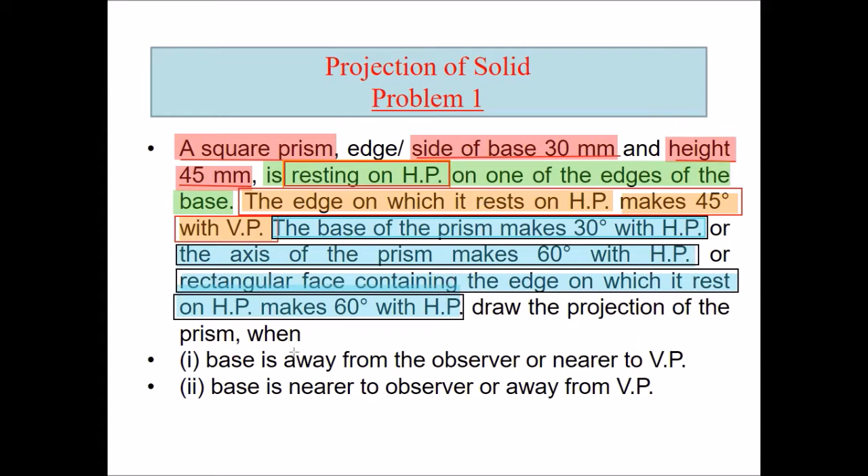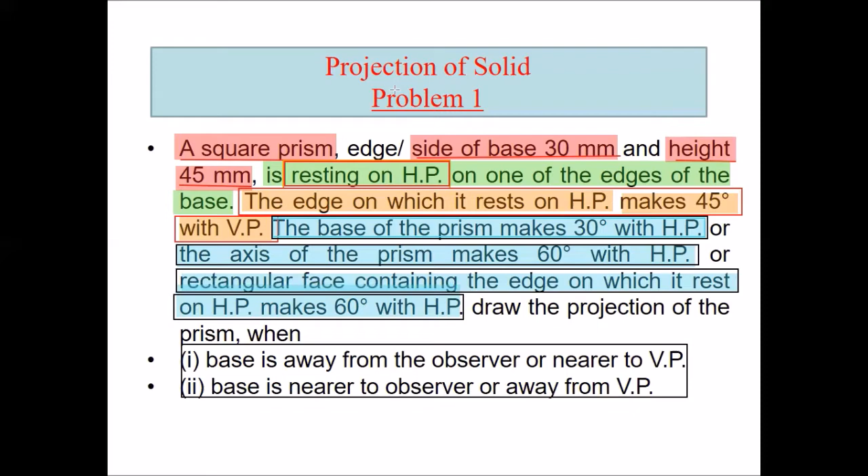And the next statement is going to justify the next criteria we should be following. And these two parameters over here, the base is away from the observer or nearer to the observer, is going to be justified in the draft format for the third step, which is indicating the inclination with vertical plane. Let's see how we can draft this problem.

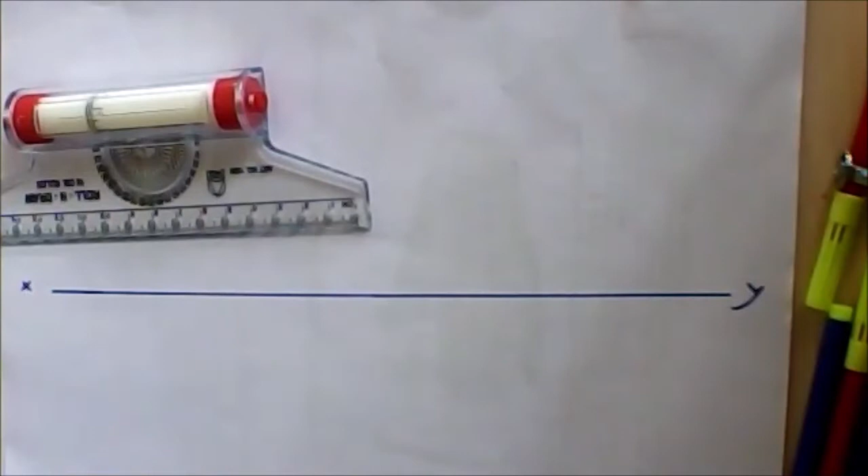So first we will draft reference line, which is representing axis of the profile we want to develop. After that, we are going to develop top view of that object. Let me mention over here the reference name. Now we'll draft top view of that profile. The data suggests that a square prism is there, which is having base edge length 30 mm and height 45 mm. I'll be placing 30 mm base over here and 45 mm height over here.

Why had we positioned this particular prism in this format? Because the problem statement had suggested that the component's face or base is becoming inclined to horizontal plane. So when the component's base or face is becoming inclined to horizontal plane, the orientation should be like this. Here we are getting a rectangular face. How can we see that? Let me show it to you.

First, let me draft the front view and top view of this given object. So I'll be drafting it over here. It is having 45 mm of height and 30 mm edge length. This is the profile. Now I need to mention the notations. Let me have A, B, C and D over here. We are following this ABCD notation for the base, which is right now placed on the reference.

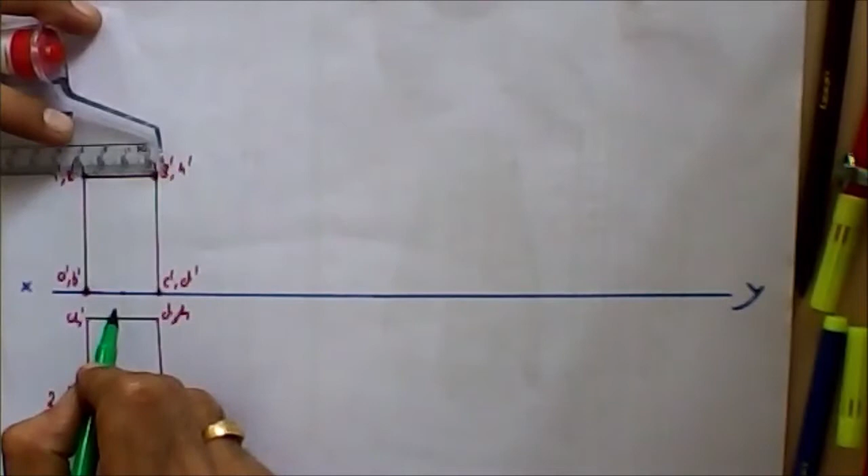If we had oriented it with a corner, then I may have a vertex over here. So there will be 2 points noted over here if there will be a vertex. And here 4 points are mentioned. It means that this particular line is representing a face. We do have one more criteria mentioned in our data statement, which was the axis of prism. So let me take that axis over here. Axis is defined just for understanding the aspect.

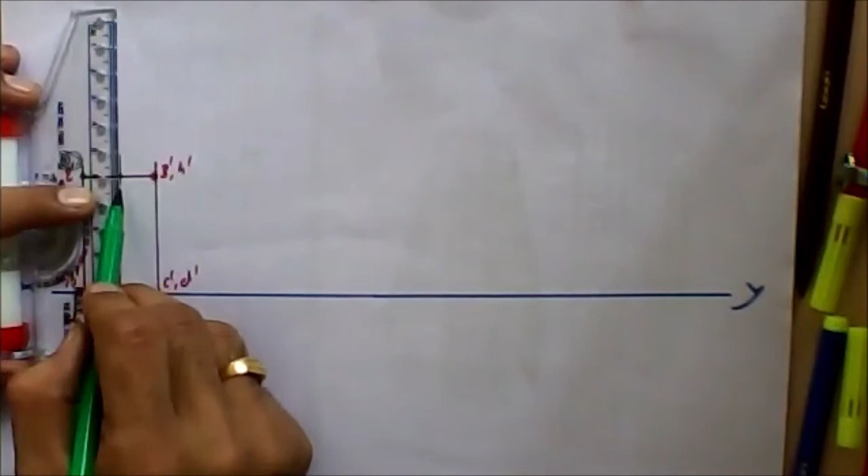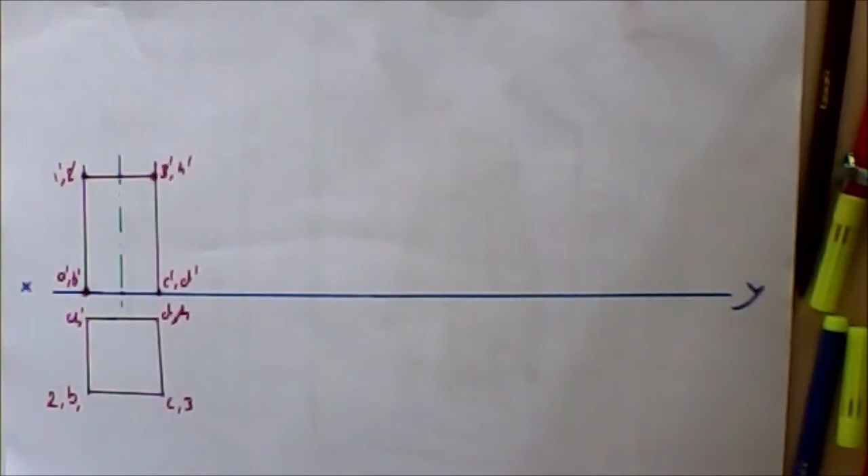Now the data had suggested that the base is inclined to the horizontal plane by 30 degrees. So let me take point C dash D dash position over here. C dash D dash. And after that, we need to have 30 degrees inclination of base, which is over here mentioned in terms of A dash, B dash, C dash, D dash.

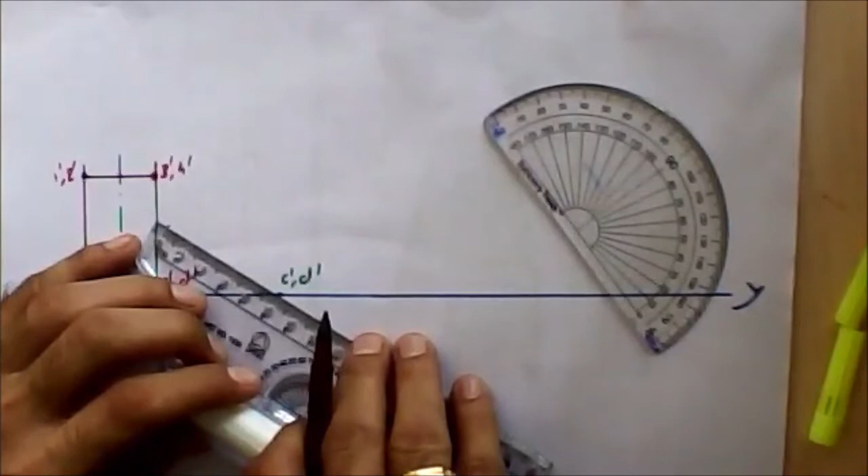So let me take 30 degrees of angle for base, and let's draft that base with the length of component which had been mentioned in the problem statement. So we are going for 30 units over here, because we are aware that the distance between C dash D dash and A dash B dash is 30 units. So over here I am going to have A dash B dash.

Now this 3 dash 4 dash point, or we can say C dash 3 dash D dash 4 dash, is becoming perpendicular to A dash B dash C dash D dash line, which is over here.

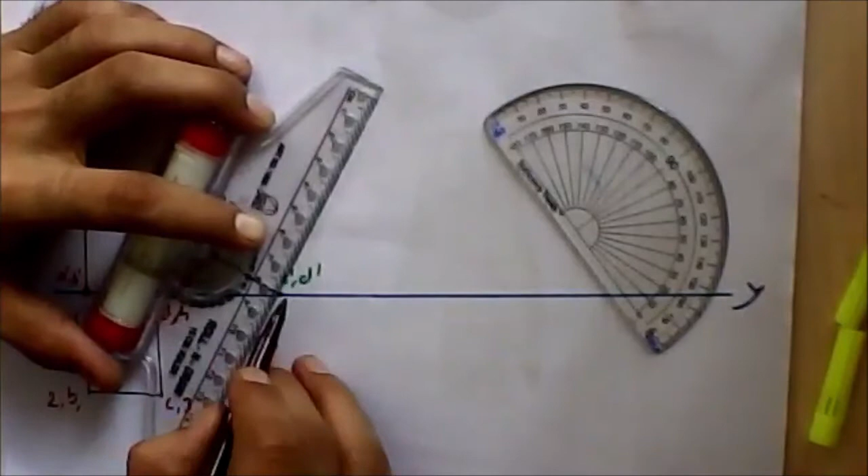So let me draft it from here for the same dimension which had been noted. So I'm moving ahead for same dimension, and let me connect those 2 points which are representing 1 dash 2 dash 3 dash 4 dash. So now I'm connecting that one. So this point is indicating 3 dash 4 dash, and this one is indicating 1 dash 2 dash.

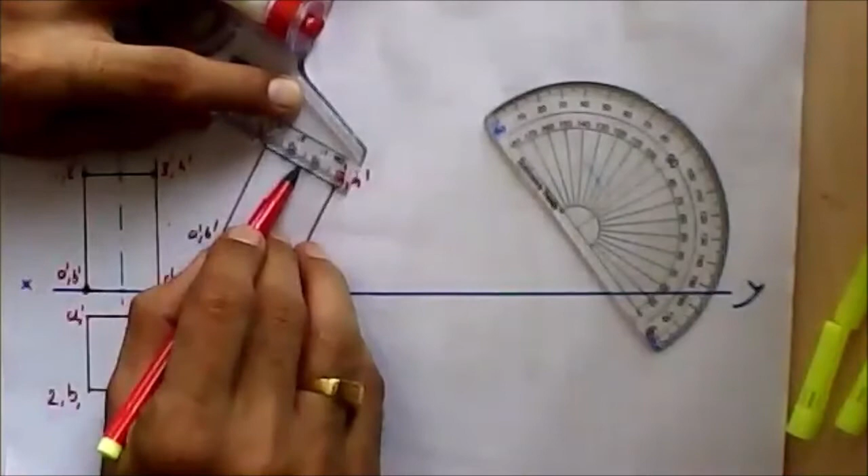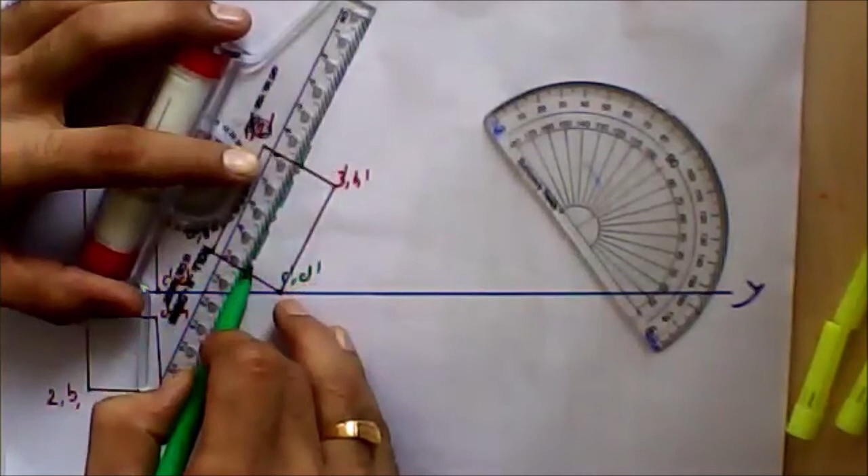We'll be having an axis mentioned over here. So let me drop that axis also. We are going to place an axis over here. Now you can see that we had taken this as an angle of base as 30 degrees. So obviously this particular angle of face is going to be 60 degrees.

This angle is going to be 60 degrees. This one is going to be 90 degrees. So the axis of that prism as well as this face are parallel. So if the base is inclined at 30 degrees and the profile angle is 90 degrees, then obviously the other angle is going to be 60 degrees. So all three statements mentioned in the data are associated with the same presentation: 30 degrees inclination of base, 60 degrees inclination of face, as well as 60 degrees inclination of axis.

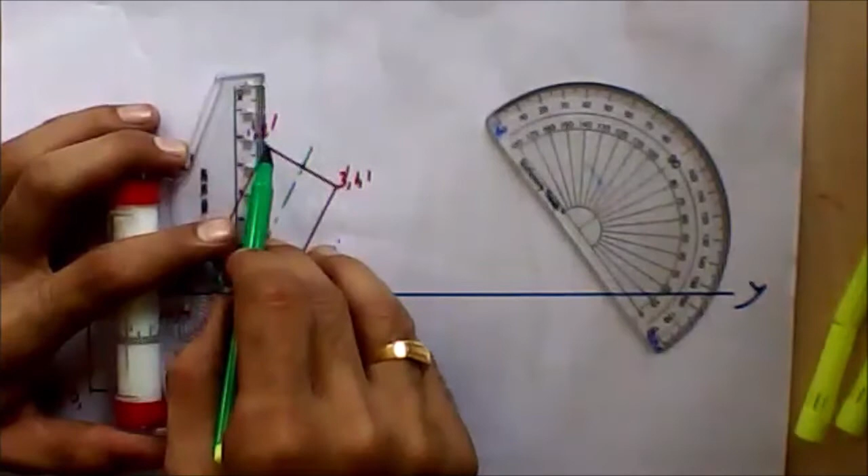Now let me draft the projection in the top view. So we are transferring projection over here in the top view, as well as the references from the previous view. And here we can see that point C dash D dash is not visible from the top. All other points are visible to us. So we are going to present C dash D dash in hidden format and others in full format. So let's identify those positions first.

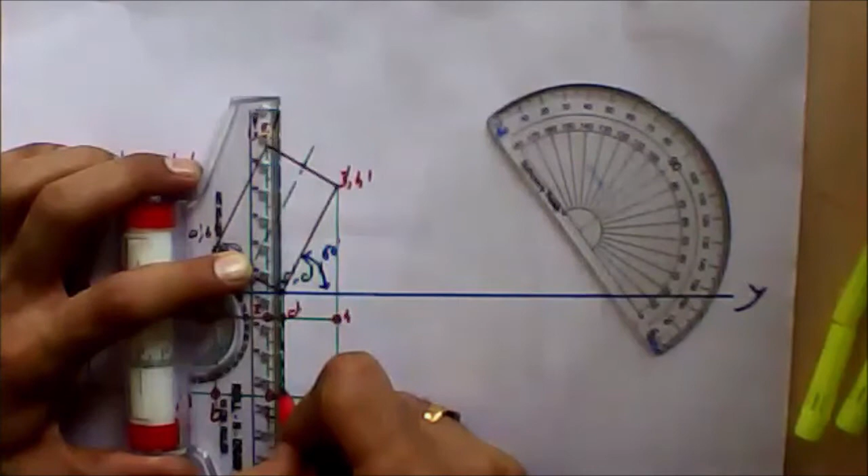Now we can connect all positions, but keep in mind that C dash D dash, or CD, is going to be in hidden format only. So we'll be positioning it in a hidden format. So CD is joined by hidden line format, and all other lines are going to be connected directly. So let me connect A with B, B with C, CD is hidden, DA.

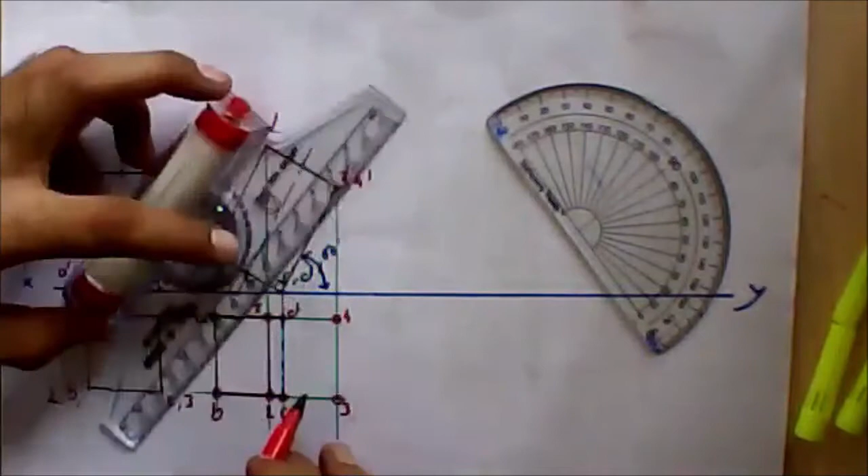Let me connect 1, 2, 2, 3, 3, 4, 4, 1, and at the same time A1, B2, C3 and D4 are also joined. So all vertices have been represented, all edges have been represented over here.

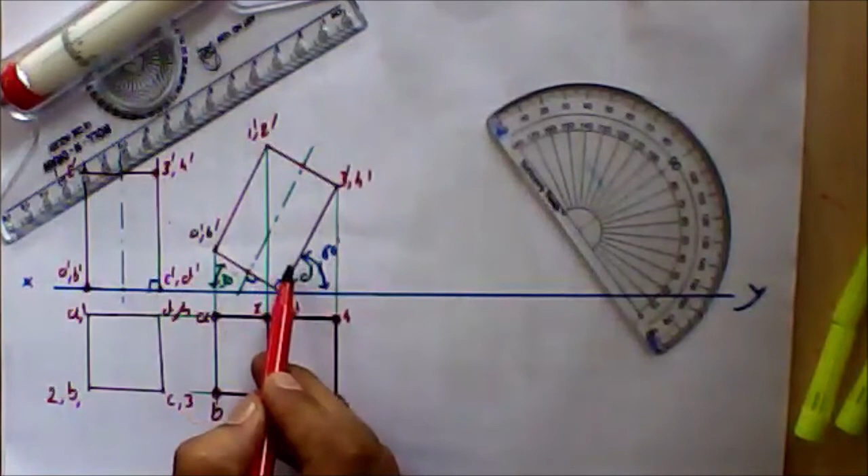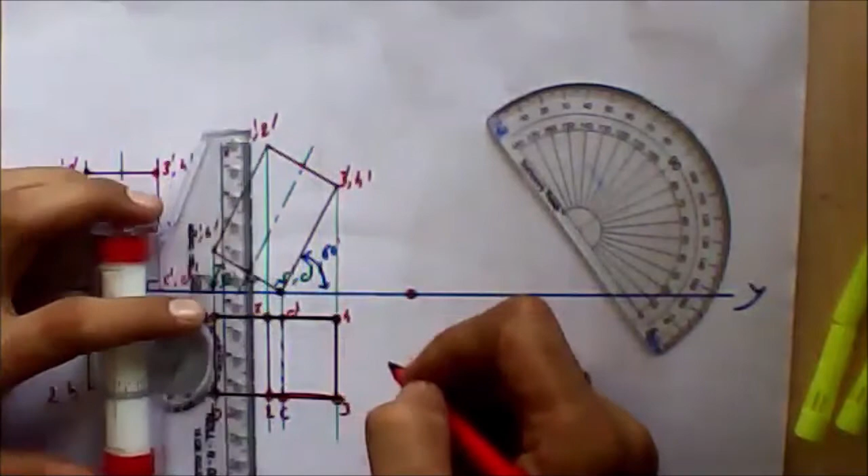Now let's think about the next statement, which is the edge on which it rests on HP, which is CD. It is resting on HP with the edge CD, and is inclined at 45 degrees to the vertical plane. So CD is inclined to the vertical plane. Let me take a position over here for presentation of an angle of 45 degrees. So I'm taking an angle of 45 degrees over here. You can draft a line.

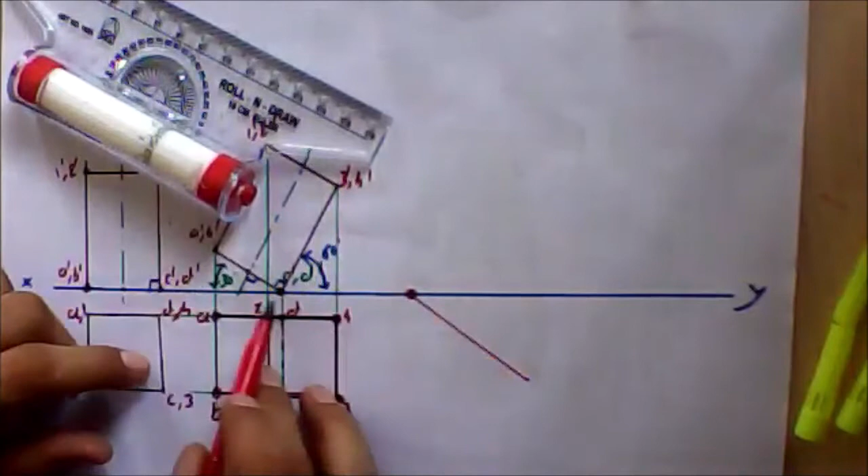Now you can see I have to place DC over here on this line. But when I plot DC on this line, if this whole geometry is reproduced over here at an angle of 45 degrees, the issue we are going to face is that point 3 is going to move away from this zone and it will be out of the plan portion. It is going to cross this reference line and we do not want that.

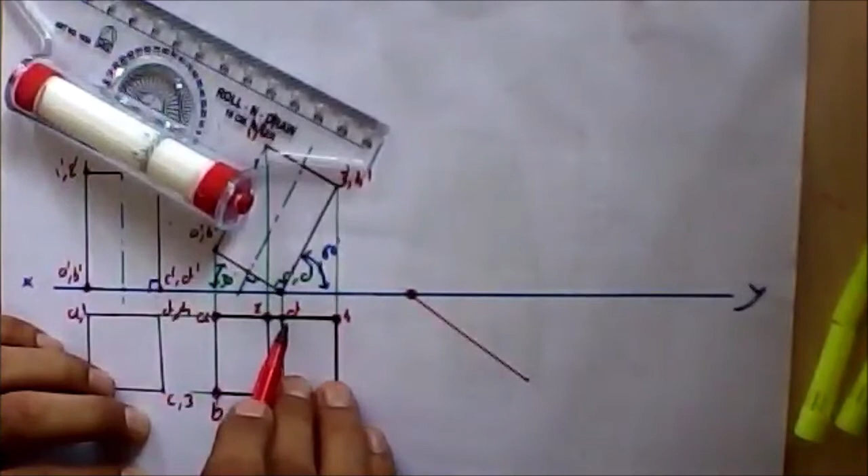So what we can do is, instead of placing it on this 45 degrees line, we can represent the angle 45 degrees from the position of DC and reproduce the whole geometry. So let's do the same over here. Yes, we are aware that we want DC at 45 degrees, but due to the lack of space, we are placing 4 points over here. After that, we'll be taking arcs to identify those positions. We are moving for the position 3 over here.

So this one is going to be 3. We are aware that 4A is perpendicular to 4 3, so we can directly have that position developed over here. In similar manner, we are going to have another aspect over here. Now let's draft those positions. I'll be taking arc length 3B, which is same as 4A. So I'll be noting those positions,

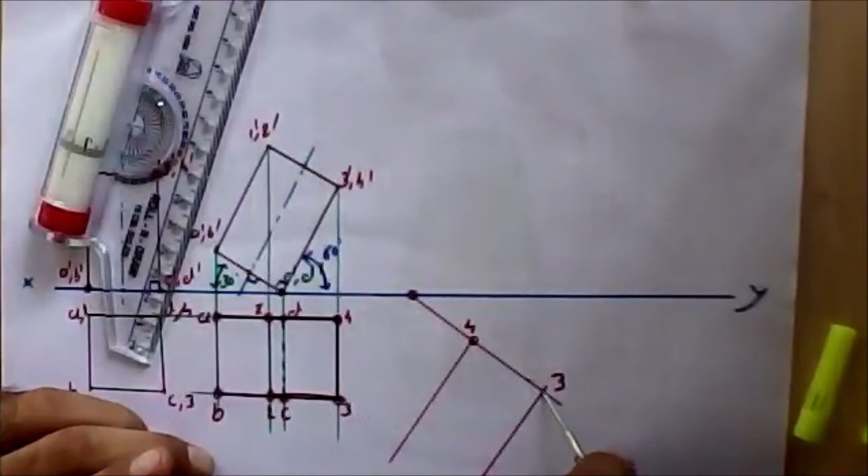and I'm connecting these points, which are A and B. So this one is B and this one is A. My whole geometry is going to be reproduced like this. Now I want 1 also mentioned in my image, and D. So I'll be moving for A1 arc length and representing that arc length over here as A1.

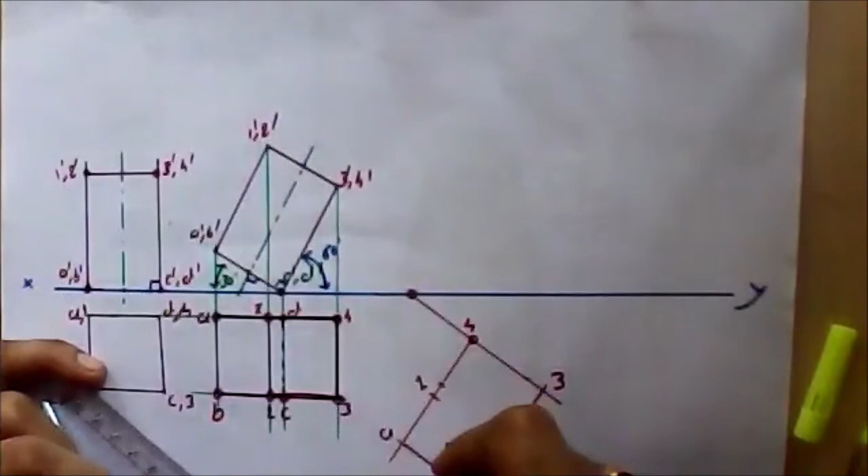I want D point position on that line, so I'll be taking arc length AD over here and placing it over here. Same length is going to be for the next component also, so I can directly use that arc length to develop that component. So now I am connecting these lines in the same format which is available in the previous view. So 1 2 is going to be over here and CD is going to be available over here. 1 2 is represented by a full line and CD is represented by a dashed line.

And we are aware that we want to represent that angle of inclination from CD only. So we'll be extending that one, producing this arc and showing 45 degrees of inclination over here.

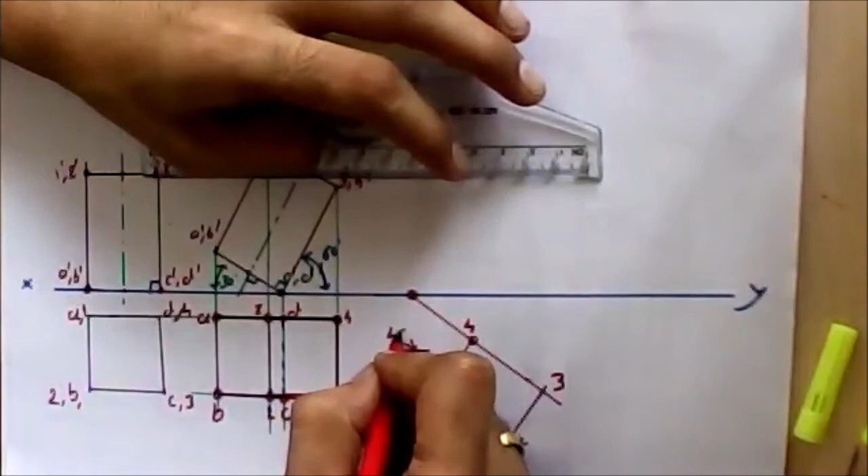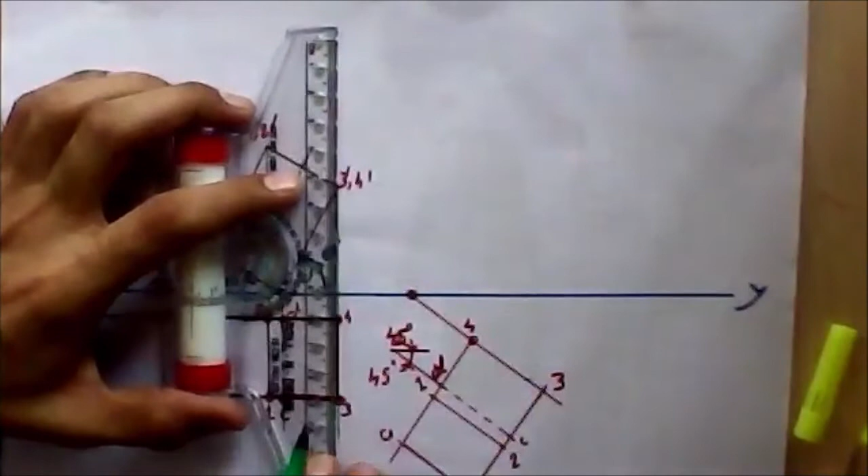This is the criteria. Now what should we do? We should be tracing all those points in front view. I'll be tracing A, then 1, then B, then D and 4 are at same orientation, so I'll be taking it, 2, C, and 3.

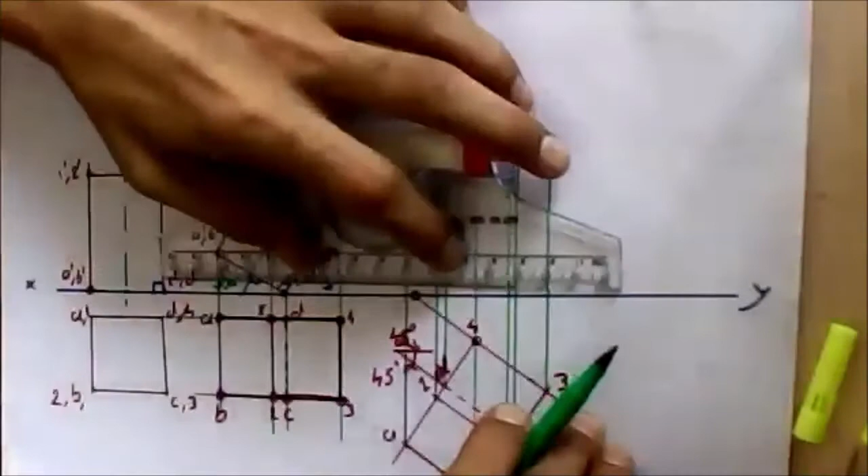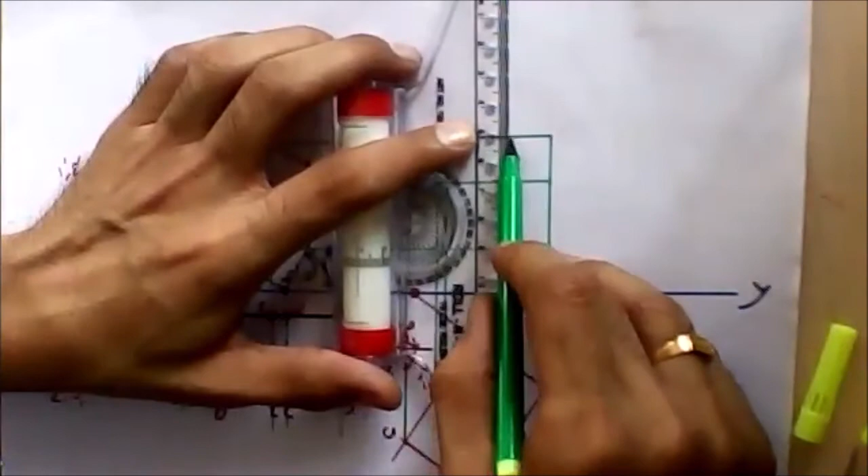And I have to transfer projections or positions from the previous view also. So I'll be transferring it from here. All the points should be transferred to the next view so that we can get the real orientation of that component. Now connect those positions. I'll be moving for A dash over here; A dash and A would be matched over here.

When you see it from here as an observer, point 4 is not visible, so all vertices and edges related to point 4 are not visible to us. So we are going to place them in hidden line format. So A dash; we want B, so I'll be referring B and B dash, so it is going to have this orientation as B dash. C would be available over here, so this would be C dash. D would be available over here, it is going to be counted as D dash.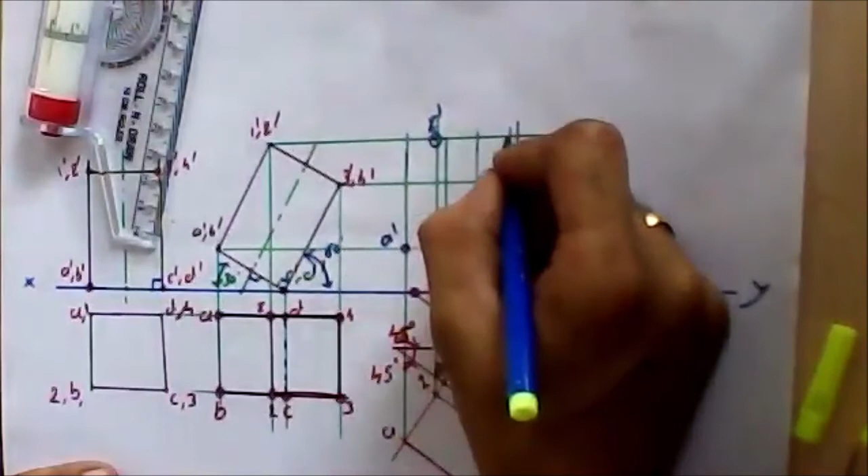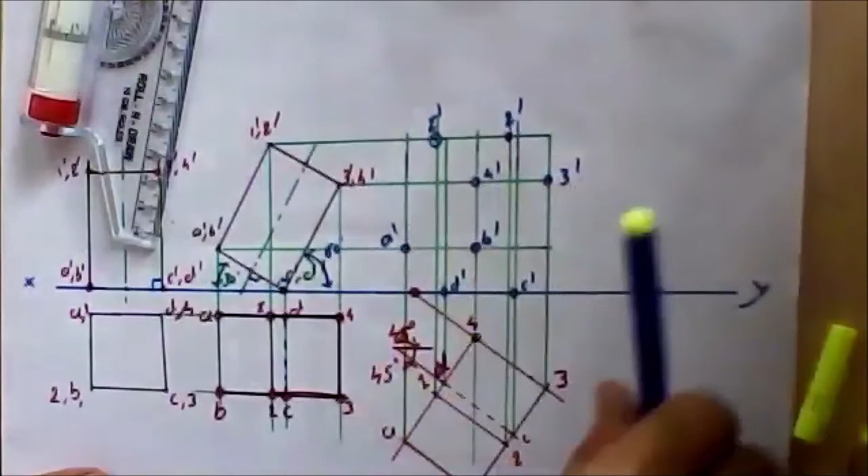Let me take 1, it's going to be available over here as 1 dash. 2 is going to be available over here as 2 dash. 3 is going to be available over here as 3 dash. And 4 is going to be available over here as 4 dash. And we are aware that point 4 is not visible, so all edges associated to point 4 are going to be presented as hidden lines.

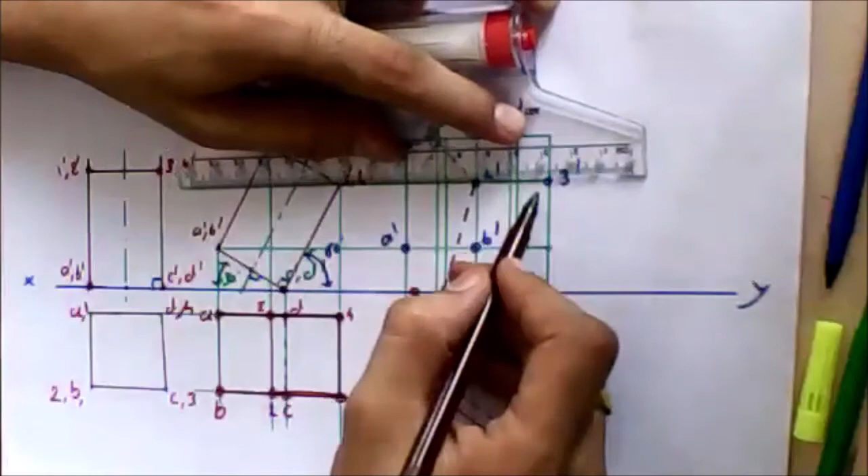So let me take point 4 over here. 4D and 4 1 are not visible to us, so I'll be placing hidden lines for those. 4D is not visible. 4 1 is not visible, 4 3 is not visible, and all other things are visible. So let me connect other lines.

First we'll connect the base: A dash B dash, B dash C dash, C dash D dash and D dash A dash. After that I'll be going for 1 dash 2 dash, 2 dash 3 dash; 3 dash 4 dash is hidden, 4 dash 1 dash is hidden. Let me connect vertices 1 dash A dash, 2 dash B dash, 3 dash C dash, and there will be 4 dash D dash, which is in hidden form.

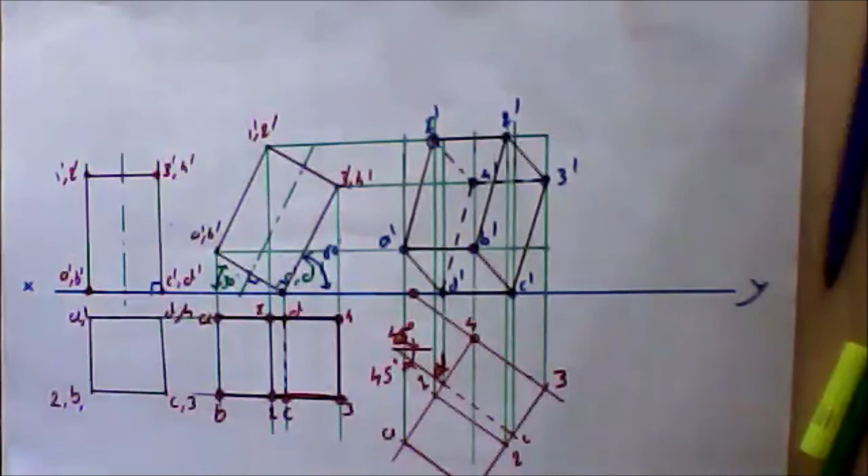Over here what you can see is the base has been represented by letters A dash B dash C dash D dash, and we are going to find those letters oriented over here nearer the observer.

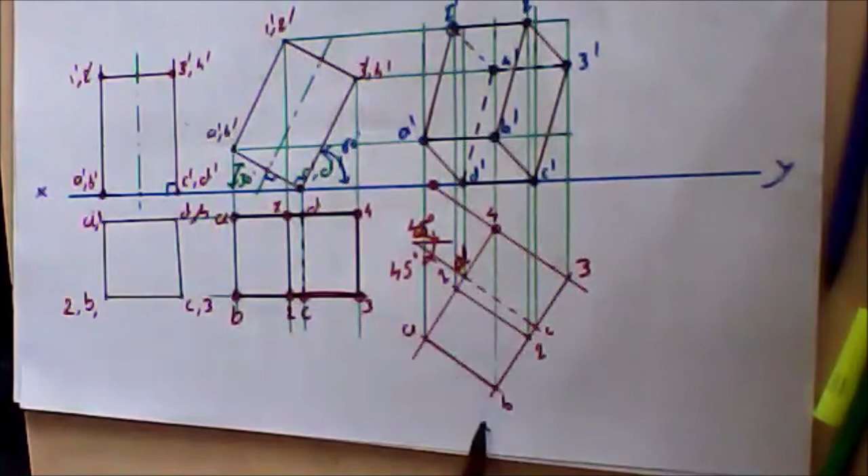So in this format we are going to say that the base is nearer to the observer and the whole orientation has been plotted. If you want it to be away from the observer, what you can do is you can have the position over here and you can orient this one in mirror format to it.

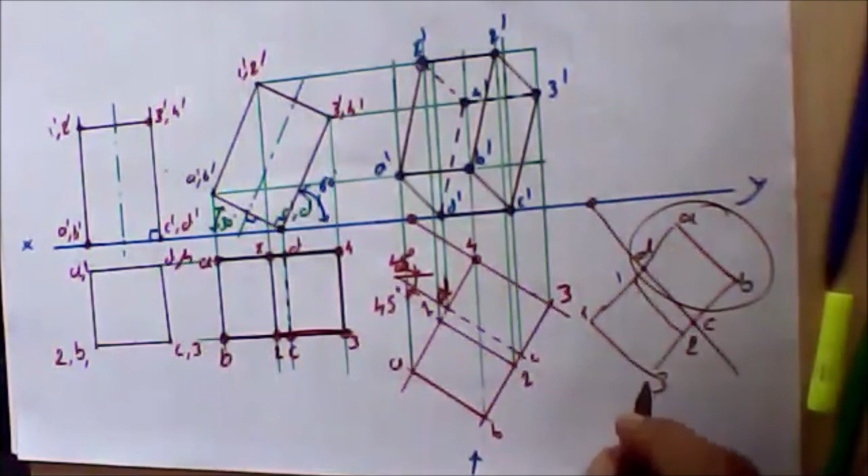So AB would be available over here. You can have AB over here. According to that, you are going to have CD mentioned over here somewhere. You will be having 1 2 mentioned over here, 3 4 mentioned over here. So ABCD is available over here. It means that this base is away from the observer. You have to reproduce it by mirroring it in this particular format, and then we'll be getting the solution over here, which is going to be the correct solution.